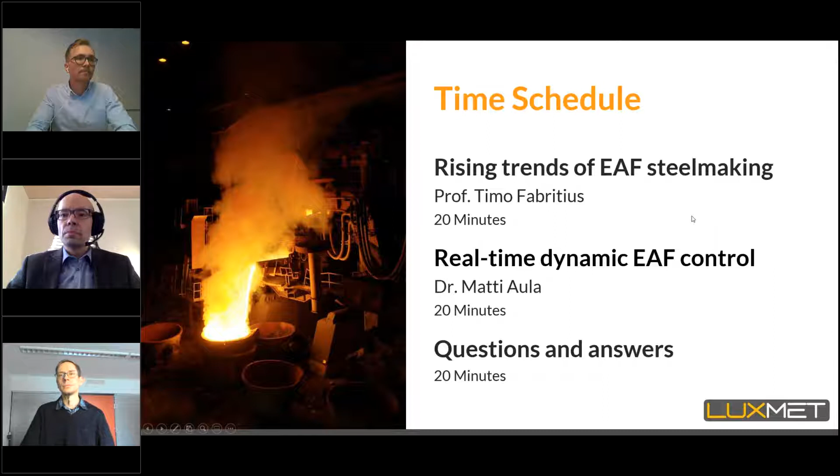Thank you, Mr. Chairman. I will now share my screen. I hope it's working now. Yes, my name is, okay, thank you.

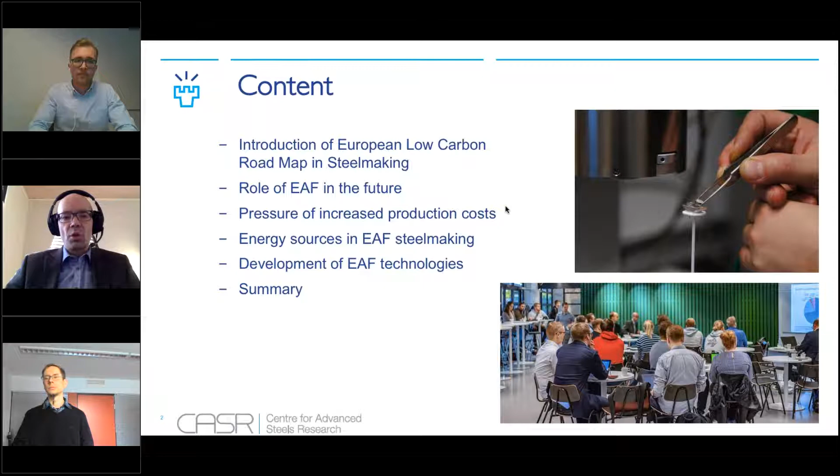As the chairman introduced, my name is Timo Fabritius and I work as a professor of process metallurgy since 2010. I will now have a short 20-minute presentation concerning the rising trend. My presentation will start with a short introduction of the European low carbon roadmap in steelmaking, then I will continue with the role of electric arc furnaces in the future and what kind of pressure there will be concerning the increased production costs because of the transition to low carbon metal production. Then some slides concerning energy sources and energy balances, and finally I will shortly introduce the development and current situation of electric arc furnace technologies, followed by a summary.

If you look at the overview of steelmaking routes, on the left side you can see the traditional integrated route starting from ore, which is used as a raw material in the blast furnace and then converted to steel in the BF-BOF converter. In the center of this figure are the smelting reduction processes, again using lumpy ore as a raw material, converted to metallic form by fluidized bed or melter gasifier units, then continued by hot crude steel production in the BOF converter.

But today we are more interested in production by electric arc furnaces, where we have two different kinds of raw materials possible to utilize. Electric arc furnaces use scrap as a raw material, but in the future we can see that the proportion of ore-based raw material, for example hot briquetted iron or direct reduced iron, will have a stronger role.

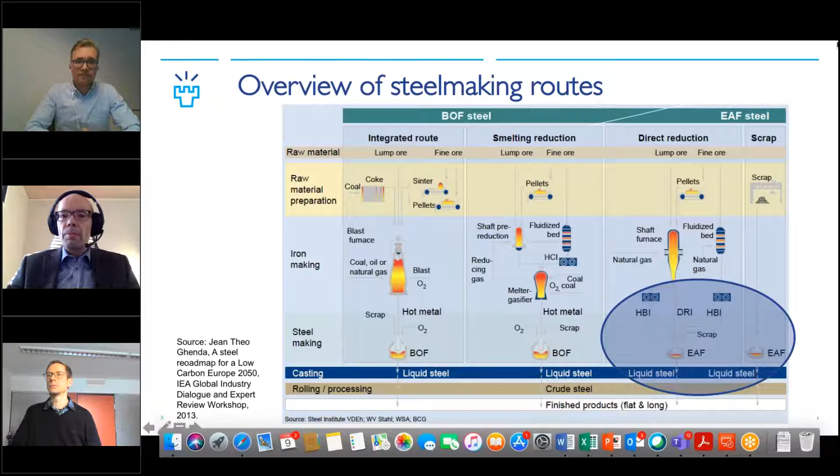If we then go to the low carbon roadmap in Europe, the European steel industry has an ambition to cut CO2 emissions by 80 to 95% by 2050. In the picture we can see the situation in 1990: we had in Europe approximately 200 million tons of crude steel production, producing approximately 300 million tons of CO2.

And the estimates for the forecast until 2050 show that steel production will increase, or remain quite similar to 1990, but there is a huge need to decrease CO2 emissions so that there will only be some tens of millions of tons of CO2.

Based on these forecasts, we can see there is no single solution to remarkably decrease CO2 emissions. It means that both blast furnace converter-based and electric arc furnace-based process chains will both be used, but the proportion of electric arc furnace will increase in coming years, and the role of electricity, natural gas, and hydrogen will also be remarkable in the future.

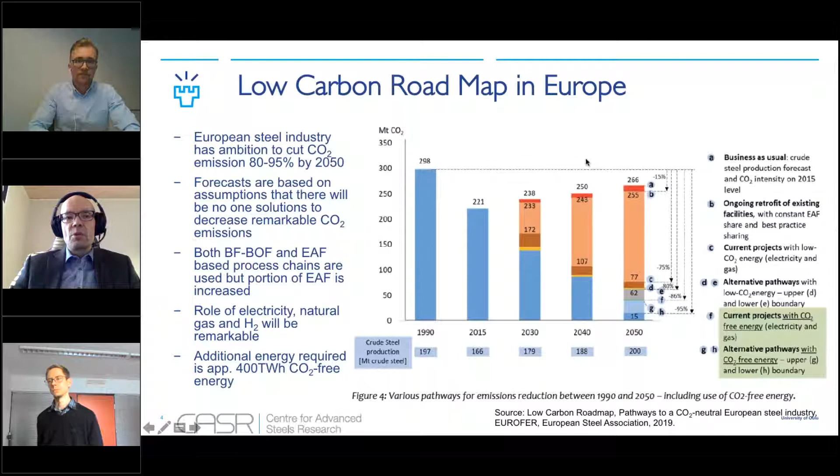And then we continue the estimation of the production structure in Europe, achieving these very challenging CO2 emission reduction targets. It requires transition to new breakthrough technologies, which can be, for example, hydrogen-based DRI used in electric arc furnace. There could be top gas recycling in the blast furnace, and then also carbon capture and storage and carbon capture and utilization. But we can see that the role of the electric arc furnace will be bigger than today, so these estimations are based on the scenario that approximately 60% of steel production is based on the electric arc furnace process.

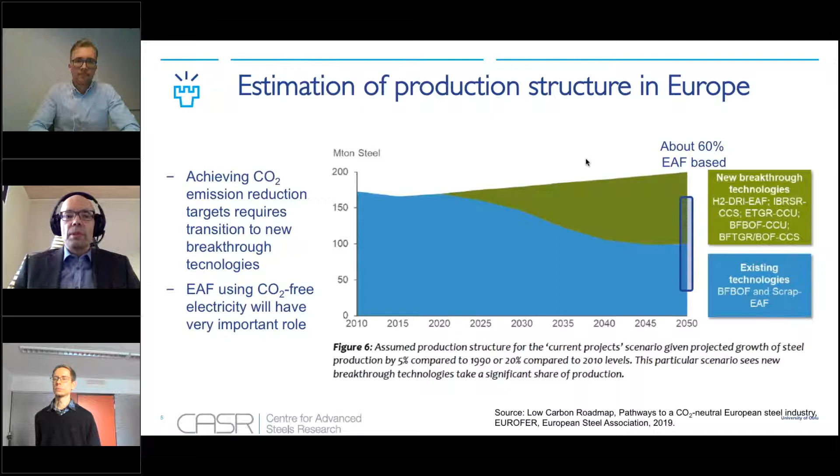If you look at the scrap availability in Europe, we can see that scrap plays a very important role in European Commission strategy and the European companies' strategy to decrease CO2 emissions. We can divide the scrap into 3 parts: there is home scrap, which is generated in iron and steel production, and the amount and quality depend on the production processes. Then we have prompt scrap, which is generated in production of steel-based products, and again it depends on the production processes. And finally, for the third part, we have obsolete scrap, which is available from end-of-life products and applications. This depends on how much we have of this kind of scrap, and on the recycling rate of the scrap.

And we can see that these scenarios are based on estimations that the volume of the home scrap and volume of the prompt scrap will be the same in the future, but this obsolete scrap will be increased. And due to aimed CO2 emissions, competition for scrap is intensified globally as well.

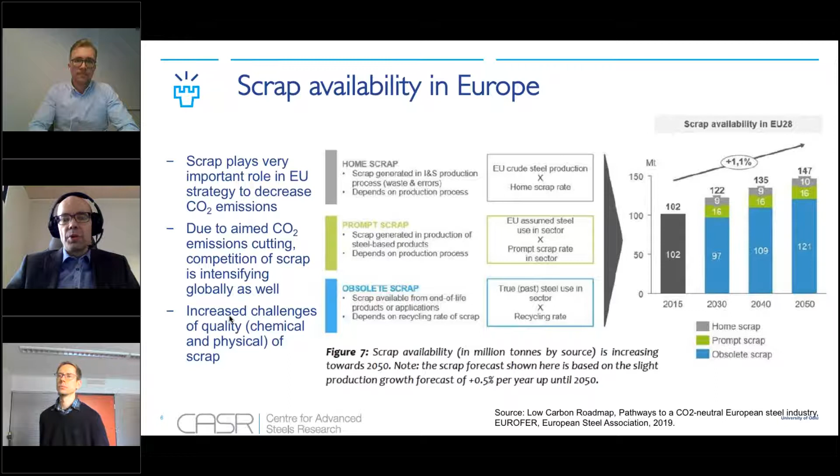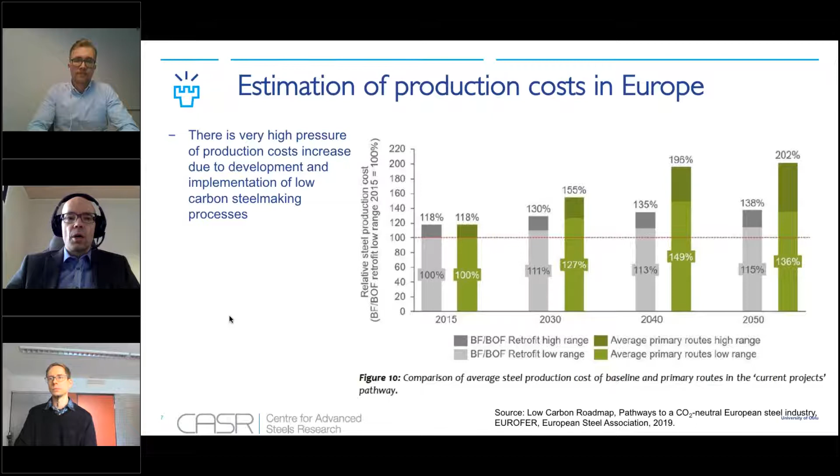If we look at the estimations of production costs in Europe, we see that there is a very high pressure of production cost increase due to the development and implementation of low carbon steel making processes. Replacement of the blast furnace BOF converter route by an electric arc furnace based one will increase operating expenses by approximately 10 to 35%, depending on the raw material which is used in the electric arc furnace.

For example, in case of SSAB, who has launched this HYBRIT project together with joint companies, they have indicated approximately 25% higher production cost compared to the current process chain.

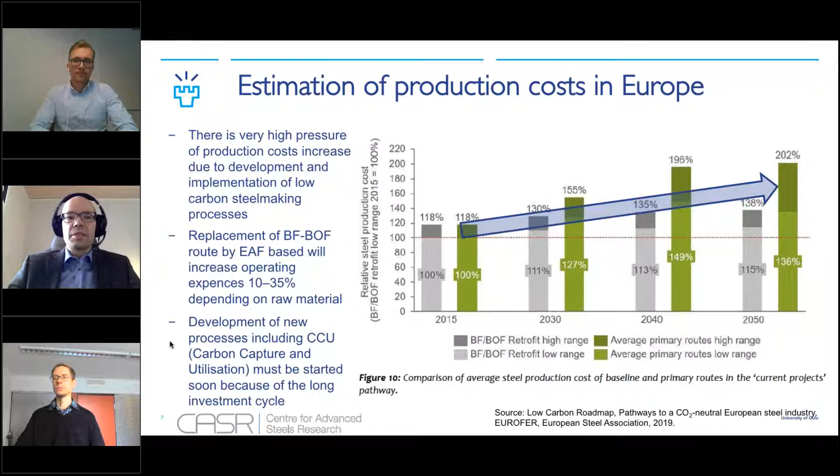Development of new processes, including carbon capture and utilization, must be started soon, because the investment cycle is so long in the steel industry. So we have to start to develop and implement these new processes to achieve the target to decrease CO2 emissions remarkably in Europe, and also in the world.

If you look at the portfolio of processes and energy carriers in steel making on a global scale, here on the left side, we can see that in 2019, approximately 70% of steel is produced based on the commercial blast furnace BOF route, and approximately 20% by scrap-based electric arc furnace, and less than 10% by commercial DRI.

If you look at the estimations concerning 2050, we see that approximately 60% of production will be based on the electric arc furnace route.

Timo, sorry to interrupt you. Or the scrap as raw material is very— Excuse me, check the mic? Can you check the mic again? Microphone. Okay, yeah, it's better now. Is it better now? Yeah. Okay, sorry, I will.

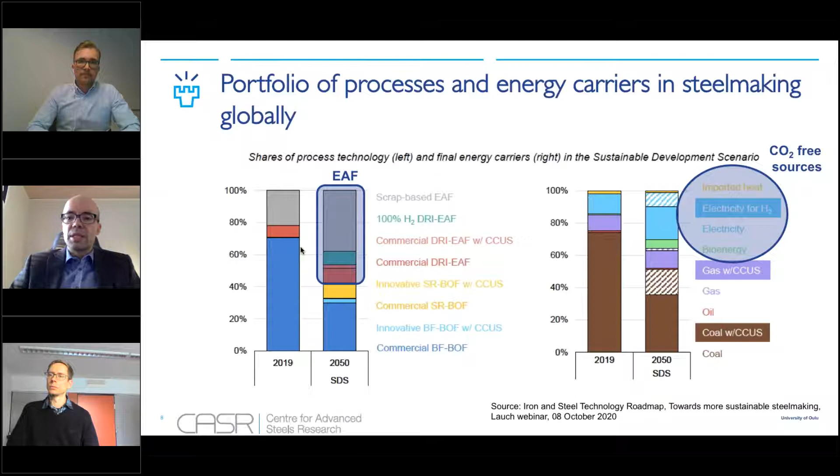Okay, good. So in the future, scrap-based electric arc, or scrap as a raw material, will be very important, of course, but there will be also an increased amount of 100% hydrogen reduced, direct reduced iron used as raw material as well, and then these commercial DRIs using natural gases with and without carbon capture and utilization together form approximately 60% of the production in this scenario. And we can see that low or CO2-free energy will be very important to achieve these low carbon targets.

It's not only the reduction process which will be changed, but also the slag and sidestreams will change in composition because of the transition from blast furnace (BF) route to electric arc furnace. If hydrogen reduced iron is used as raw material, it will dramatically affect the slags, dusts and sludges generated in a steel plant. In the future, if the electric arc furnace is the main unit used for internal circulation of slags, dusts, recycled refractories, this will also affect the control of side streams.

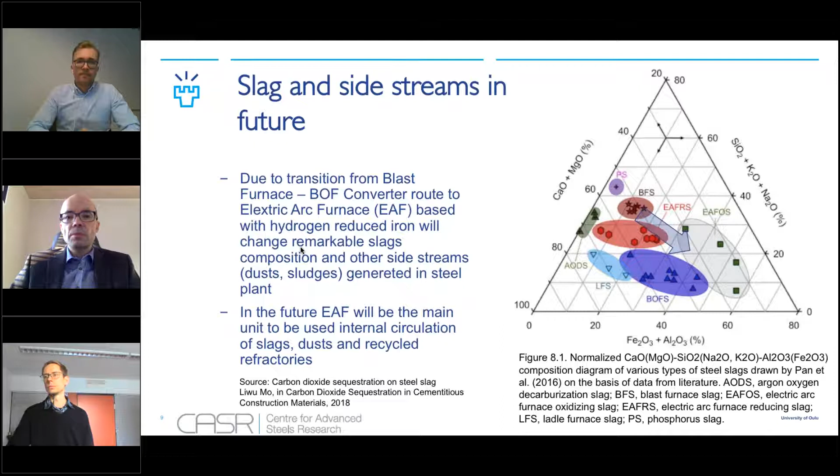If you look at the energy balance of the electric arc furnace, approximately 50% of energy is utilized for steel melting, and the off gases and cooling of the furnace are the largest losses, together accounting for nearly half of the energy used.

If we look at the input, we see that half of the energy could be based on exothermic chemical reactions with oxygen. If we are using DRI as a raw material, we will need more carbon or reductant to reduce the FeO that is partly present in DRI. If secondary raw material briquettes are used in the electric arc furnace as a way of internal recirculation, energy consumption will increase as well.

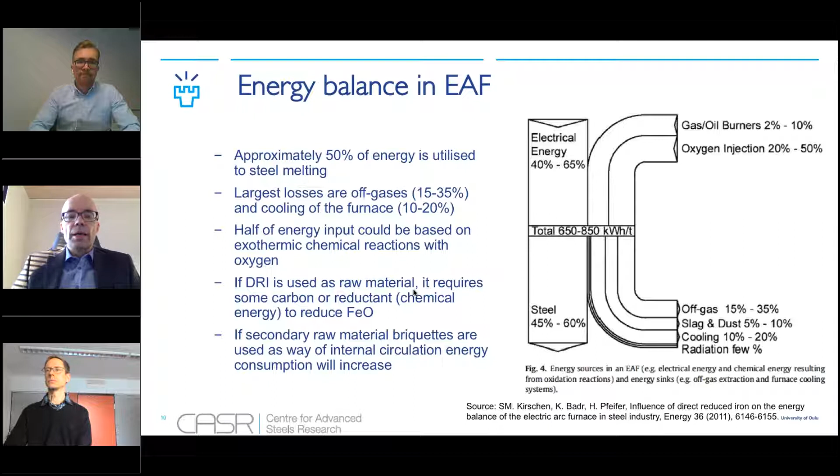Here we see the energy sources which can be used in electric arc furnace today. Carbon is the most important energy source, and of course easily oxidized elements like silicon, aluminium, and titanium in scrap can be utilized as energy input to the electric arc furnace charge. But natural gas may replace electrical energy, and it also lowers CO2 emissions compared to the use of carbon or coal.

It is important to remember that energy efficiency depends on the status of scrap melting, so that with high scrap height, the utilization rate is higher and better. Today there is also a started discussion concerning the use of hydrogen as an energy source or reductant as well.

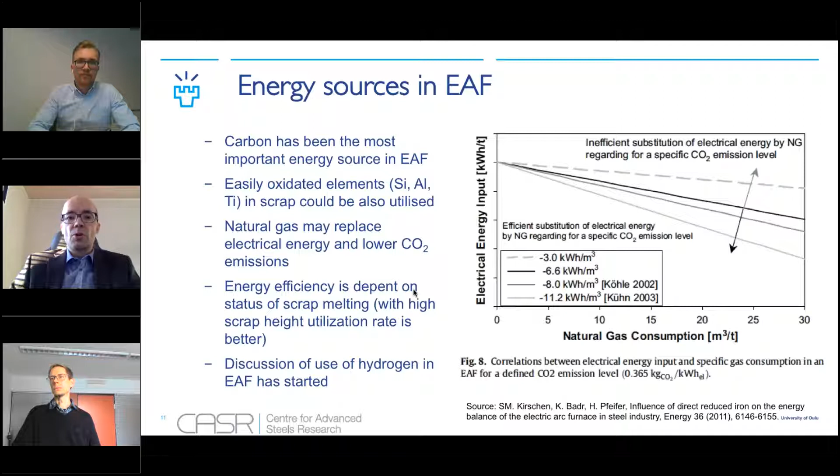If we continue with DRI, we see that the use of DRI will increase the demand for energy, and it depends on the metallization degree and carbon content of DRI. There will also be a higher slag amount because metallization is not 100% in DRI, and we have to use more slag formers to balance the silicon load in the electric arc furnace.

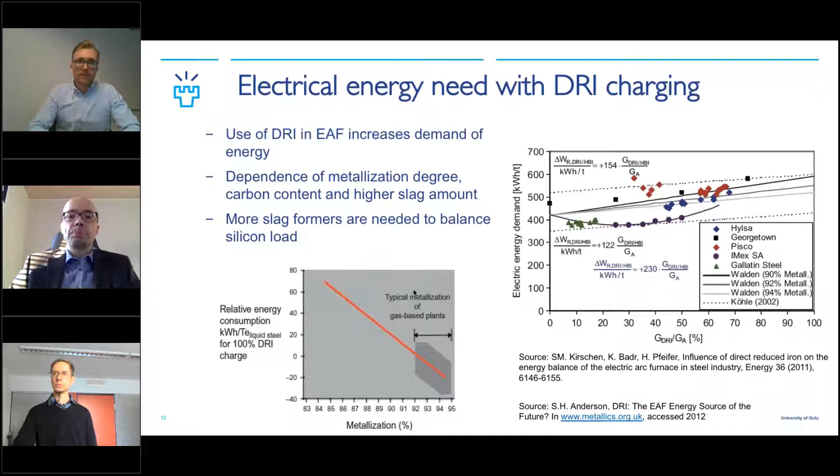All of these factors increase the amount of slag produced during melting. This means we have to develop process and monitoring methods so that they will be more flexible with different raw materials and different energy sources in the future.

If you look at the evolution of electric arc furnace technologies, we see a remarkable decrease in electric energy consumption during the years, and the time has decreased dramatically, and electrode consumption has also decreased, so we are now working with quite low values. The evolution has been very strong and comprehensive, but due to tougher requirements concerning specific energy consumption and higher production rate, online monitoring methods are required.

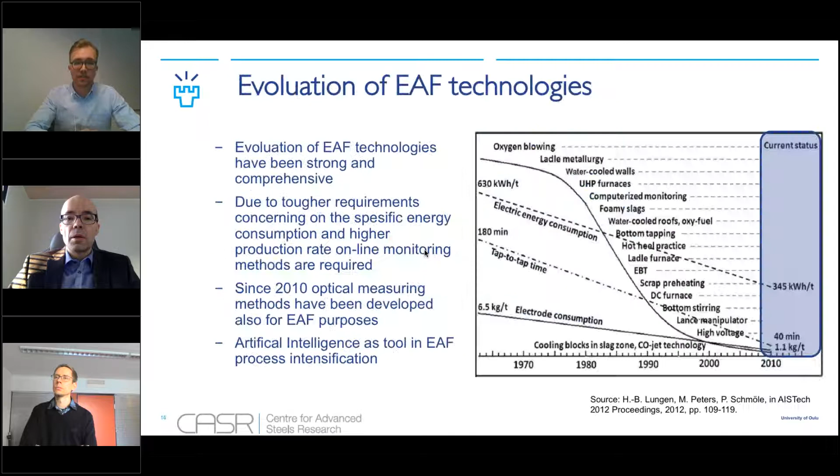So, Timo, sorry to interrupt you again. Can you go back a couple of points, no, the summary slide, like 10 seconds back in the last slide. Yeah. Yes. Yeah. Sorry, so I start again. Reduction, from the reduction of energy demand. Okay, sorry, I'm very sorry of these difficulties with the noise or the voice.

There is a need to reduce energy demand in electric arc furnace, and there are many different kinds of possibilities to tackle this challenge, by more flexible use of energy sources, by hot charging, by preheating of scrap, by continuous charging, or by...

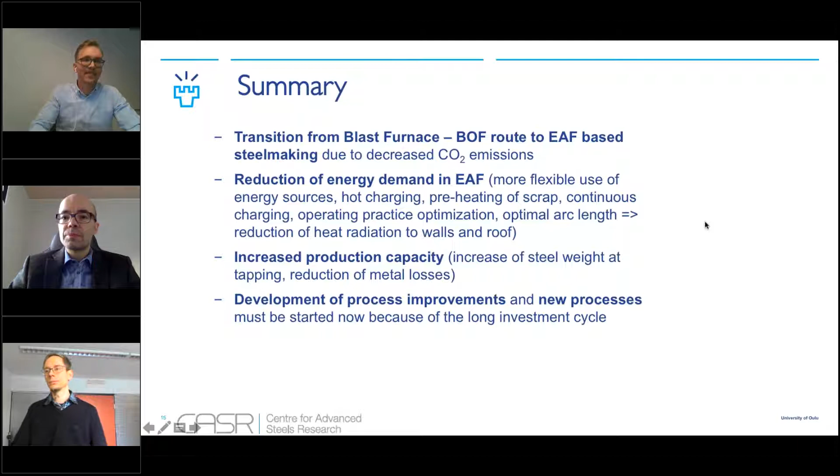Timo, it seems that there's some technical challenges again, so. Okay, so maybe I can say thank you very much, and give the floor to the next speaker. Thank you very much. Thank you, Timo. So it's time for Matti. Yeah.

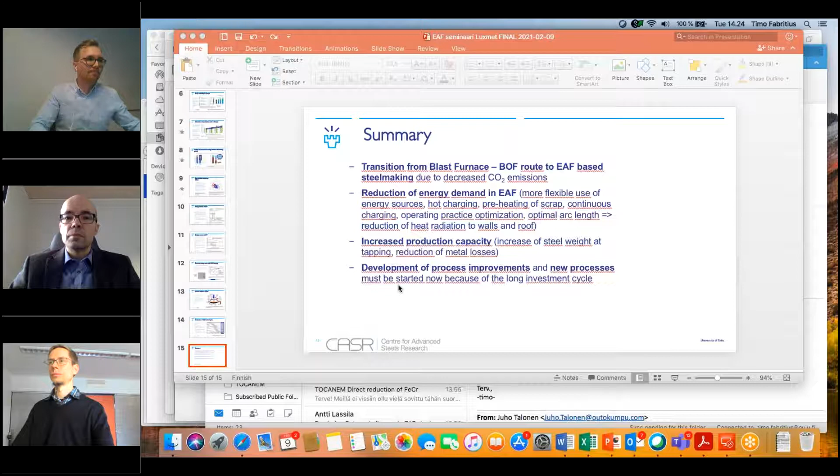So thank you, Mr. Chairman. I hope you can all see my screen. Yes, we can see it. Oh, good. Okay, so good afternoon.

My name is Matti Aula, and I'm today talking here about the real-time dynamic control of EAF. And thank you, Timo, for the interesting remarks about the trends of the EAF. Here I'm trying to answer the questions of how these trends have been addressed in the past, and how they will be addressed in the future.

So let's start from the electric arc furnace process. As we all know, it's a process to melt the scrap, basically. So what we want is to melt the scrap and generate a melt which has the optimum temperature and composition. So if you think about what we can control in the electric furnace, many of the parameters are related to the scrap and its melting. In the early parts of the EAF process, the electrodes bore into the scrap, and when the electrodes are inside the scrap pile, we can input the maximum amount of power because the arc is shrouded in the scrap and all the sides are covered by the scrap. So most of the energy inserted in the furnace will stay with the steel.

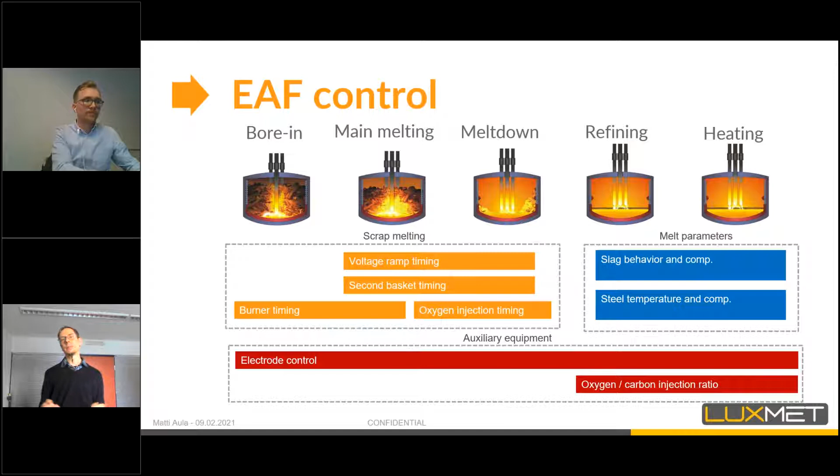As we see from this picture, a lot of these different control variables are related to scrap melting, so I'll be talking a bit more about that. When you measure scrap melting, the most conventional method is to observe the kilowatt hours put into the furnace compared to the charge amount in tons, for example. Another very traditional method is just to hear the furnace—when the arcs get uncovered, the noise of the furnace starts to increase, and subsequently, if you start slag foaming, the noise of the furnace will go down when the arcs are covered with the foaming slag. Also, a method which practically every furnace uses is the cooling water energy flow. We never want our side panels to overheat, because this causes a serious risk of water leaks, which can be critical and even catastrophic in some cases.

State-of-the-art methods, or the best available systems, many people use arc stability parameters to assess scrap melting in the furnace. In the flat bath phase, the slag surface and steel surface start to calm down. There is not so much movement, and not so much scrap falling into the arc. Because of this, the arc gets more stable toward the end of the scrap melting, and this is often used to define the end point of the scrap melting on average in a furnace.

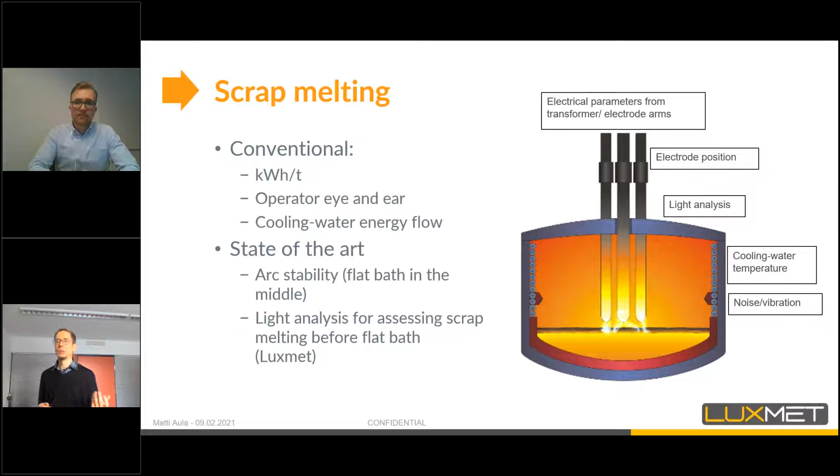The solution we are presenting here is to use the light emitted from the furnace to measure the scrap melting. I will now explain a bit more about this method of analyzing the light from the furnace.

When we talk about analysis of light and optical emissions, we are talking about the radiation that our eyes can see, and there is a lot of information in this spectrum. Basically, we measure the light emitted from certain areas of the furnace, transport it to the spectrometer, and break it down into the different wavelengths.

By analyzing these different wavelengths, we can tell a lot about the process that sent this light to us. For example, if we are seeing just cold scrap, we only see dark current, no light, because the scrap is shrouding the sides. When the scrap starts to melt, we see an increased amount of thermal radiation because the arc radiation starts to heat the surfaces. Sometimes we also see alkali peaks, which are related to burning material in the furnace.

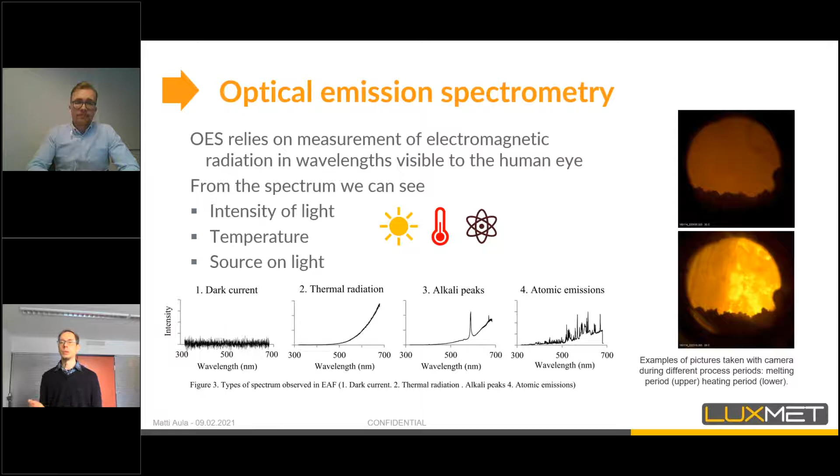We'll go back to this a bit later. Also, if we see the arc itself, the arc light, we see a lot of atomic emissions coming from the hot plasma.

What we do is place some measurement heads on the furnace roof, usually three measurement heads, depending on what we want to see in the furnace. We gather the light emitted from the furnace and transmit it to remotely placed spectrometers, so we have no active equipment on the furnace roof. We can be sure there's nothing exposed in these hazardous conditions.

When we have obtained this spectrum, we analyze it with our homebrew software, and then we present this information either to the operators through the user interface, or we can use this information directly to control the EAF process dynamically, straight away through the field bus, for example.

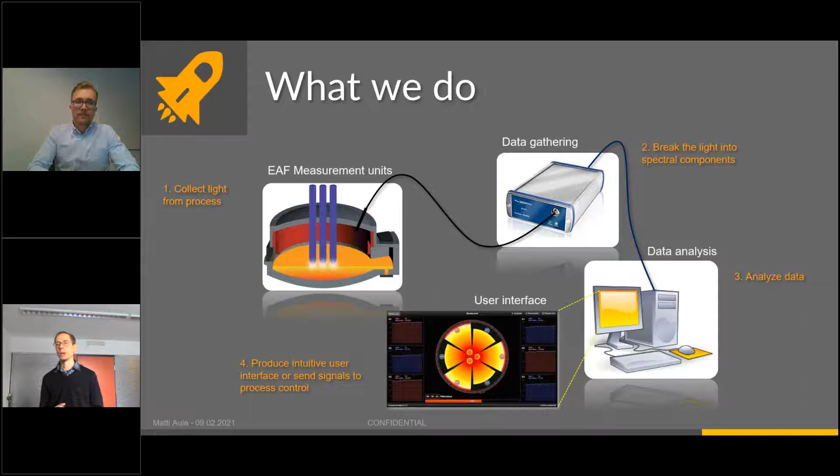I was discussing earlier these different types of spectrum. Many people ask what the relevance to the process actually is. When we talk about light coming from the furnace, it's quite important to know what we are actually seeing, because oftentimes, for example, if your off-gas temperature rises, it can be for many reasons. The biggest thing is to separate in the data whether it's coming from the flames or from the slag surface, because we never want to mix up flame temperature with the actual melting of the slag.

With spectrum analysis, we can filter the data to contain only the information we need for process control, and we don't make false assumptions about melting or some kind of combustion reaction occurring in the furnace.

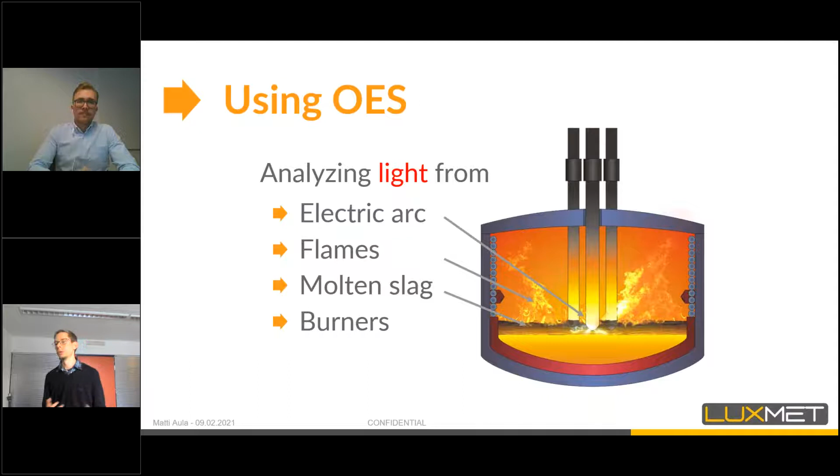This information about scrap melting can be used in many ways, as we were discussing earlier about the furnace. For example, when the scrap melts, we can optimize the timing of the voltage taps, reducing them as the scrap melts. We can also time the burners and injectors based on the scrap melting. As Professor Fabritius mentioned, burners should be operated only when there's solid scrap there. If the scrap starts to melt and the burners aren't burning into the scrap, their efficiency degrades highly, so you want to shut down the burners when the scrap starts to melt, or near the end.

This information can also be used in timing the second basket charging, so you can put the basket into the furnace as soon as safely possible.

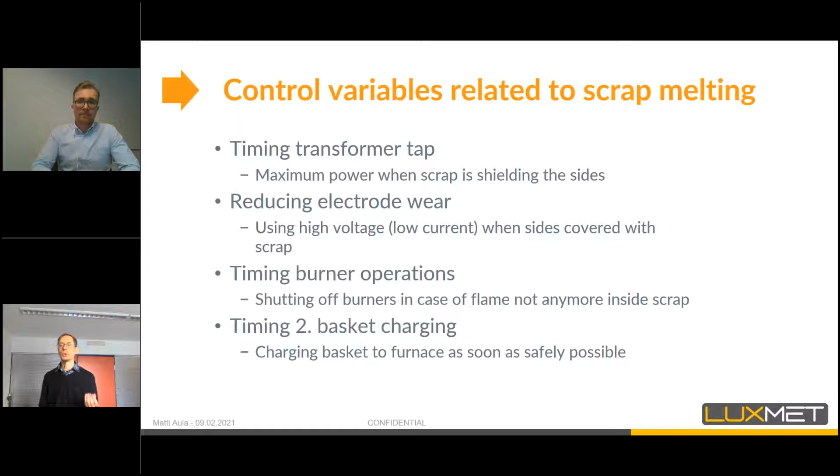When you talk about online OES and other methods, they of course complement each other. We cannot say that one method works for everything. So what our system is especially good for is measuring local scrap melting and early scrap melting.

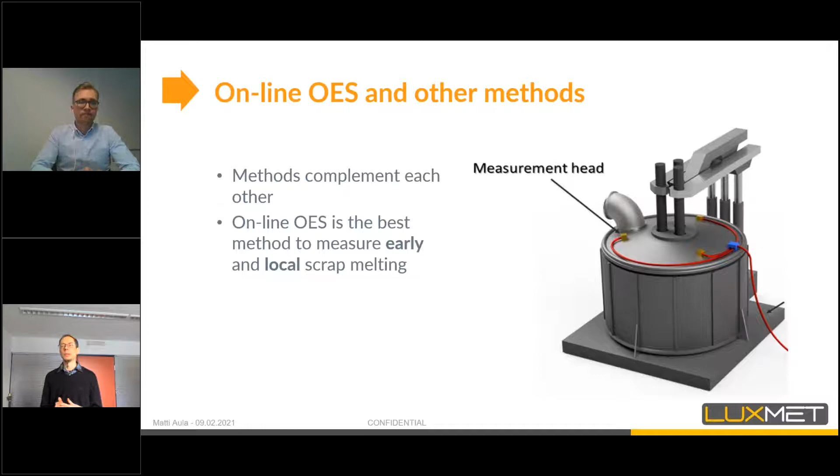So I've been talking about our technology and scrap melting in general. There are also other things we can control in the process. One control system that practically every furnace has is the electrode regulation system. In this system there are two different levels. One is the dynamic, fast control level.

This electrode arm position is controlled according to current and voltage fluctuations. For example, if the scrap falls onto the plasma, we want to change the position of the electrode arm so that the arc length stays approximately the same. This kind of control is fast and ongoing, usually done with PD control and hydraulic actuators.

The furnace also utilizes long-term or mid-term control, which is transformer tap control—what is the correct transformer tap to use at this phase of the process. Normally furnaces have a tap profile they use, usually some set profile with kilowatt hours per ton.

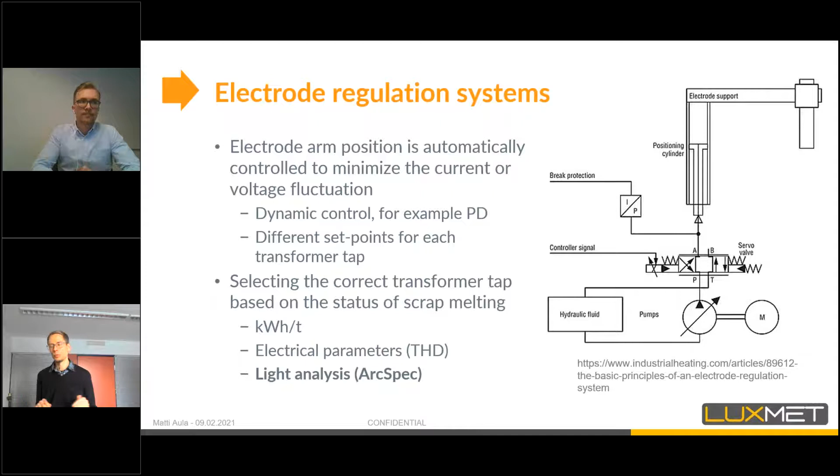The other major source of automation in a furnace is injection and burner control. Usually what needs to be determined in the EAF is when does this end and start?

For example, the start of the foaming period is usually decided by the operator, often done from the slag door—this is the conventional way. The operator looks in the slag door, sees the scrap starting to burn out, notices there's a pool, and says let's start foaming.

But there are also other methods to do this. For example, we can use electrical parameters like THD, meaning arc stability, to estimate this. If our arc stability is already high, we know we are close to flat bath, and of course we should not use the burners again.

Also a very important method nowadays in EAF control is off-gas analysis, because the ratio of carbon injection to oxygen injection needs to be in a certain range, and it's extremely difficult to define this range without knowledge of the off-gas.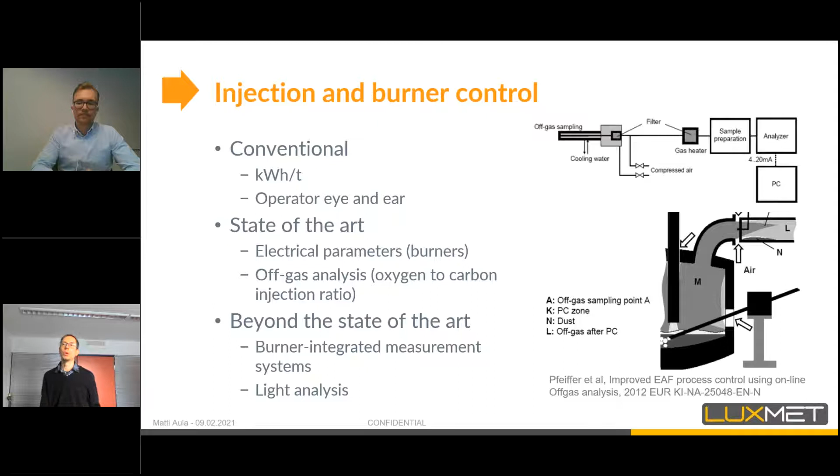And when the process starts nearing its end, there is going to be a question of whether the melt is already ready for tapping. Now we are talking about the melt temperature and the melt composition.

I think the most conventional method to do this is to get a sample probe, put it into the furnace, and check the temperature. In recent years, there has been a lot of interest in robot probes—instead of operators doing the probing, we can have robots do this for them.

This has two advantages. For example, the position of the probe is more uniform with robots, because with operators it depends on the height of the push. The second thing is that nowadays we don't want the operator too close to the furnace, as it can sometimes cause health hazards.

And in the future, when we talk about how to tackle these different requirements of the EAF process, we need to also improve this endpoint control. And there has been quite a lot of development in this section.

For example, there are coming things like online temperature control. There are certain fiber optic measurement systems, for example, which can be used to feed fiber to the melt. And also there has been lots of research concerning online slag composition analysis.

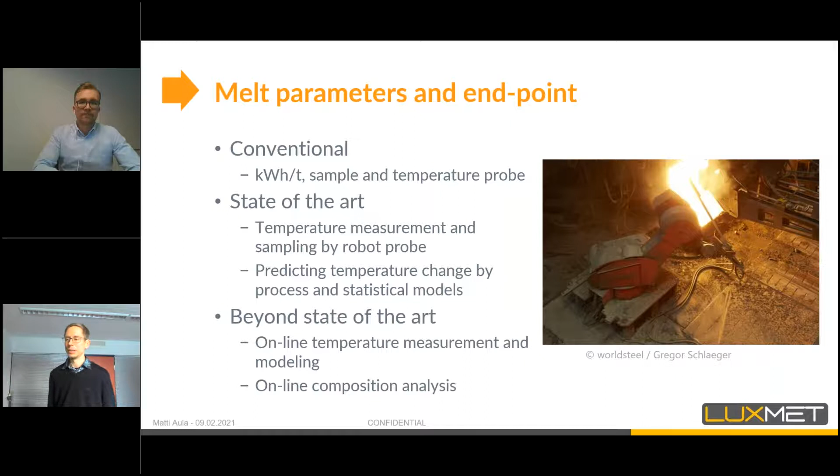And when we talk about these future challenges, and how could we make the furnace even more efficient and CO2 friendly, a big thing concerning this is the definition of the endpoint of EAF.

There has been a lot of research and development concerning this topic. But the problem with many of these models and such is that they are only as good as the data they are trained with. So we need these new methods to get more and better data for this automatic control.

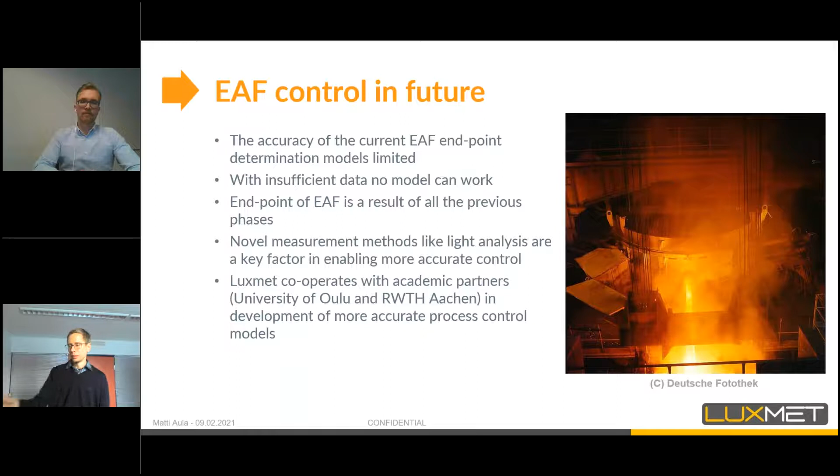And we also understand that integrating different sources of information is very important in furnace control. And we are actively working in cooperation with University of Oulu, with Professor Fabritius, and also with RWTH Aachen in developing these kinds of process models and control models.

Just quickly about these control models, there are two main groups. There are statistical models, which basically are trained - we throw a large amount of data to a code, and the code tells us what is the result. This method is very good in accuracy. We can say that it's the best it can be, because we can use like 100 different parameters.

But the trouble in this approach is that the teaching and the training can be very narrow. So even one week later, it can be that the model is not good anymore, because the teaching data is already obsolete. So these kinds of models require constant tuning - they are quite heavy from a maintenance perspective.

The other method to use in this kind of model approach is to use process models which try to replicate the physical and chemical processes occurring in the EAF. This approach requires much more coding, of course, because you are trying to model the phenomena as they are. And also, they are never just as accurate as the statistical models.

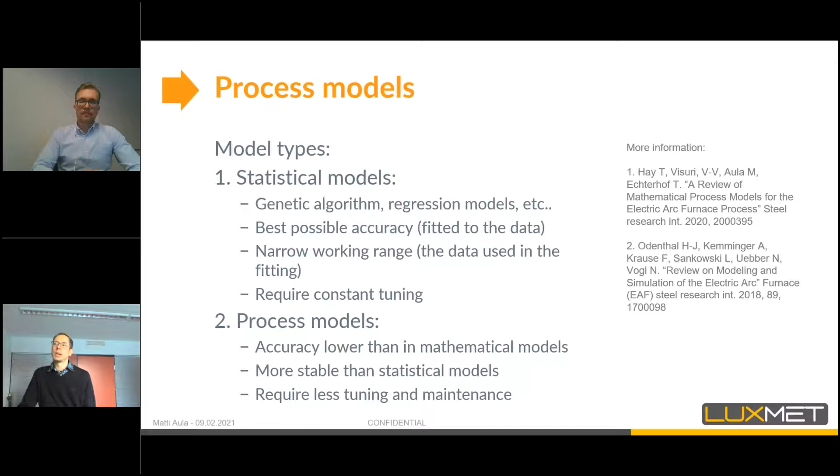And if you want to know more about these model developments, there are two different papers that you can read. We have done one review article with the University of Oulu concerning these mathematical process models. And also Professor Odenthal made a very good review article on different types of model and simulation approaches for electric arc furnaces.

And in the end, many of you have heard for sure about machine learning and AI applications. It has been a long talk and long road in electric arc furnace. One could say that this development of these methods in EAF has not always been very fruitful.

But I think that nowadays we are reaching the state with the data we have that it's going to be reasonable and relevant in the near future. And always with these machine learning systems, it's quite important to know your application.

So one way to use these machine learning methods is to use them to tune the control function parameters of the electric arc furnace. For example, when I talked about these statistical models, they have the problem of drifting out of scope. But if you tune the control parameters of these models with, let's say, genetic algorithms, you can continuously update your models.

And if you are using such a model, this is a huge saving of time, because the engineers don't have to be checking the models all the time, or the control systems don't have to be adjusting a PID control, but you can do it automatically in a systematic way.

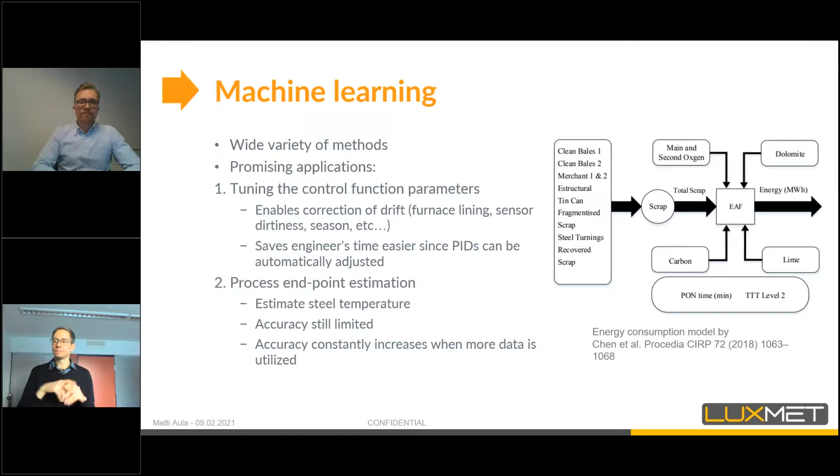So in summary, a big shift in electric arc furnace steelmaking is that the conventional method of operator doing all the control functions, like timing of carbon injections, is switching from operator controlled to computer assisted. The operator used to do all the actions and a lot of the thinking, hearing the noise of the furnace, checking how it looks, and making a decision. But in the future, the code is going to be making the suggestions, and these models and control systems will tell the operator when would be a good time to start, say, the second basket charge. It's then up to the operator whether to believe it or not, but it's no longer an active decision by the operator to decide the timing.

I also want to emphasize that the light analysis system we utilize is a very good tool, especially for measuring scrap melting and controlling the different parameters linked to that. When you compare and combine data from different sources, in the future I'm sure we can obtain even more accurate furnace control, and I sincerely hope we can meet all the demands that Professor Fabritius was talking about for the requirements of electric arc furnace control and efficiency.